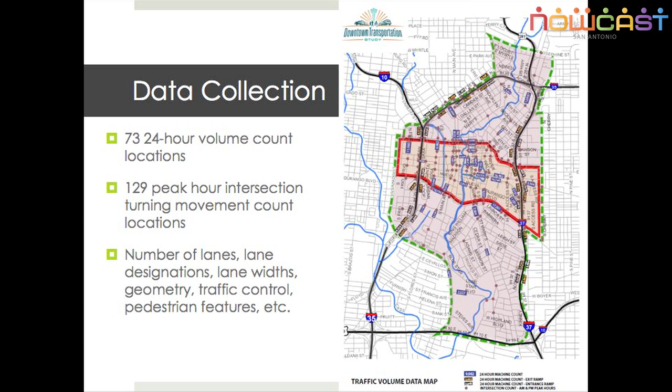On this map, you can see our study area. We have a very large outer study area, and our focus was primarily in the downtown core, which is highlighted in red. All of that information went into our model, which it's hard to see from there, but things that look like little ants on the screen show you part of our model.

We actually have a model for the whole of downtown, and all of the improvements that we were proposing, we tested out on the model, and we tested them out cumulatively to make sure that nothing was going to create a problem today or in year 2020.

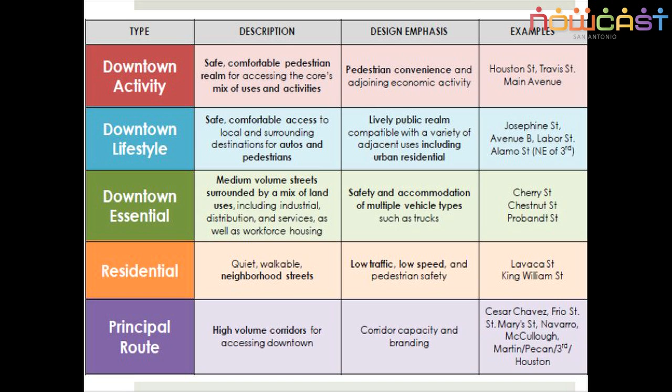The principal routes were ones that we identified that serve a primary role of carrying traffic through the downtown. That doesn't mean we don't still think we can improve them or create some different amenities along them, but it means that we need to keep in consideration the fact that it is important for traffic purposes.

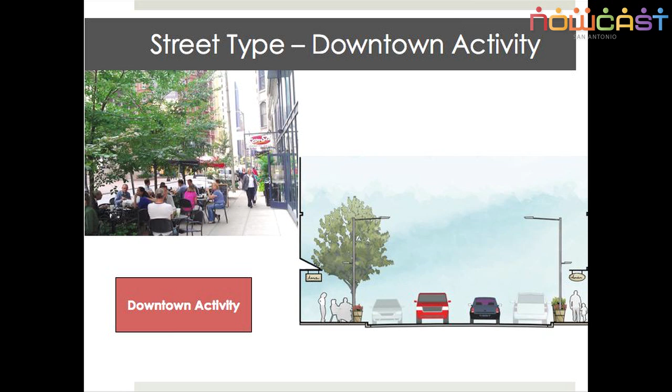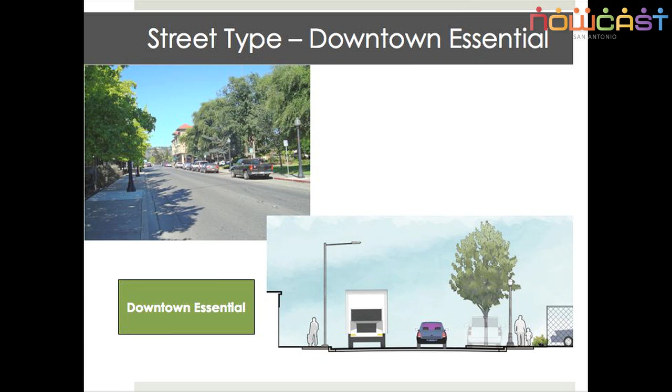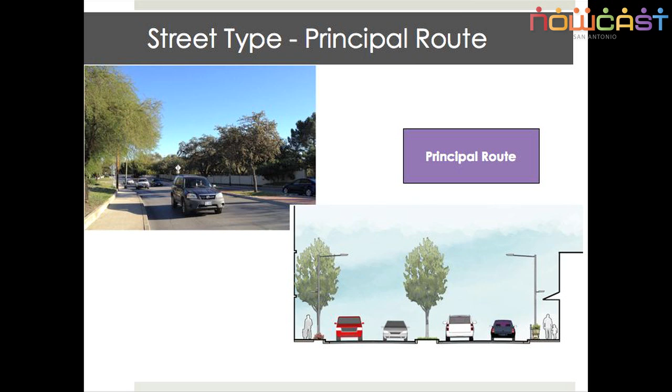It may or may not have parking on one side, would have trees and sidewalks. And the principal route would primarily have 4 lanes, possibly with a median for access management purposes.

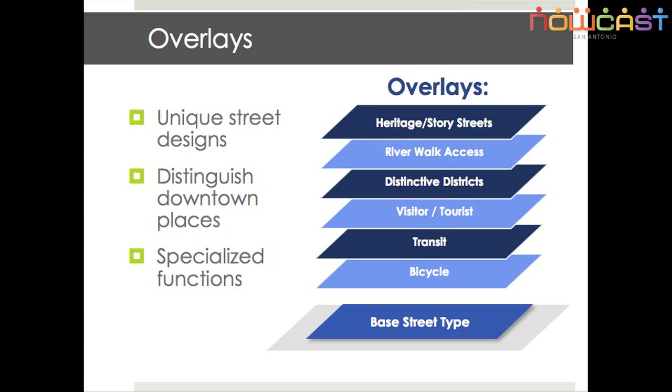In addition to the 5 street types, we created overlays. Overlays are based on unique characteristics of the roadway, for instance unique street designs, specific places downtown which should be reflected in that overlay, or special functions of the roadway. A good example is the transit overlay and bike overlays.

We did ask people to fill out comment cards and go online to fill out our survey. I wanted to show you some of the results of that.

We asked people to identify top choices for the different categories of streets. Interestingly enough, furnishings - benches or cafe seating - and street trees were the top two for downtown activity and downtown lifestyle. The downtown essential street had...

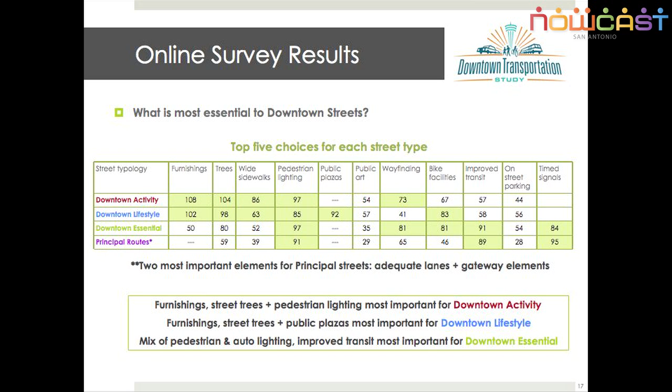Pedestrian and auto lighting plus improved transit. We also asked you some questions about specific roadways.

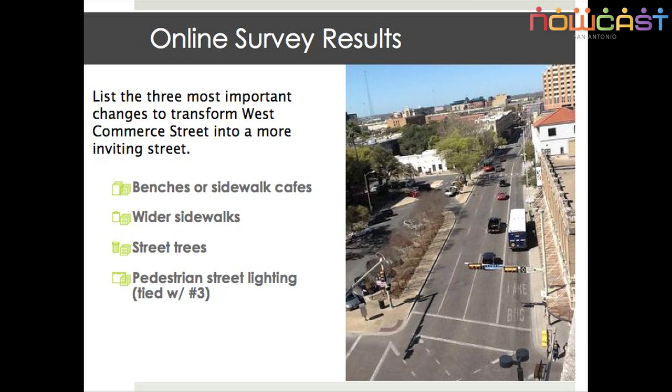For instance, on West Commerce Street, we asked what are the 3 most important changes you could make? The top 3 were, again, furnishings, wider sidewalks, and street trees, with pedestrian street lighting tying for 3rd place.

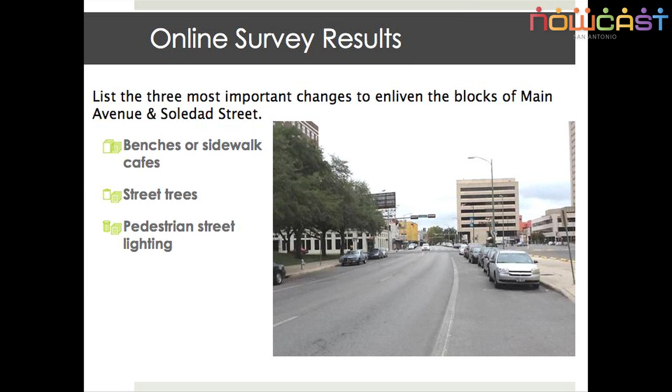On Frio, it was enhanced crosswalks, pedestrian street lighting, and wider sidewalks. And on Main and Soledad, street furnishings again, street trees, and pedestrian lighting.

We also asked a question about, given the choice, would you choose to allocate roadway space for converting a one-way street to a two-way street, or using a lane to provide wider sidewalks, street trees, and other amenities? 84% of respondents preferred to use a lane for the other amenities rather than converting it from one-way to two-way.

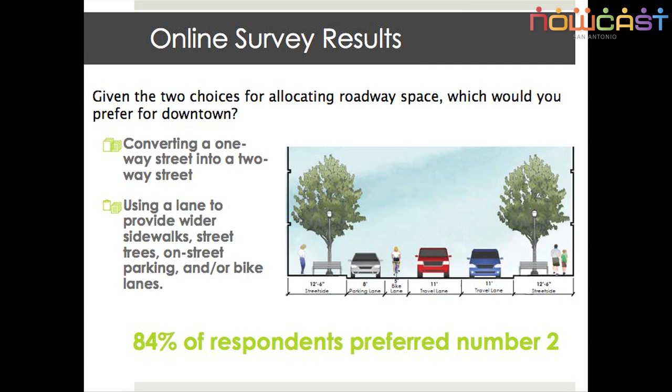Another question we asked: what was your favorite street for walking? Houston Street topped the list, with Alamo and Commerce coming in a far second and third. For cycling, it was Alamo Street, St. Mary's, and Broadway.

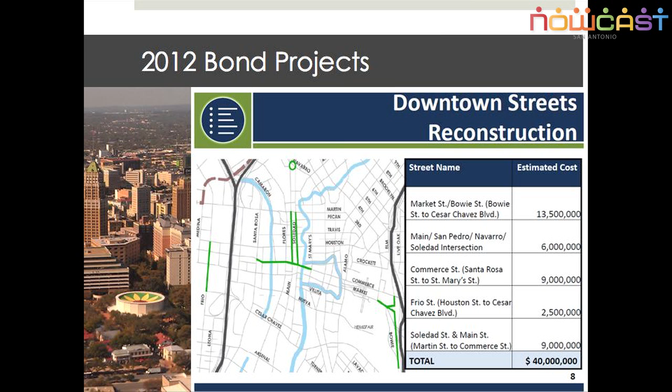Now I want to talk to you about the bond projects. There are 5 bond projects. As Sonia said, early voting started today and goes through May 12th. Each of these projects has a specific type of improvement, and I'll describe them to you.

Market Street, as Sonia mentioned, the consultant team that is just starting the design is here tonight, so you have an opportunity to ask them questions. The primary purpose of the Market Street realignment is to reorient Market Street to run parallel with Commerce and to connect with the southbound exit ramp at Commerce.

You'd have connection to the east side via Commerce and Market and that new connection. You'd also have a connection from the southbound exit ramp to Montana, Cesar Chavez, and Market. And you possibly would have a connection to the east side and Robert Thompson Center via a two-way operation on Montana, which is something being looked at.

The second project is Commerce Street, with limits from Santa Rosa to St. Mary's. What we're proposing on Commerce Street is to remove a lane - the bus-only lane - to accommodate wider sidewalks, street trees, streetscaping elements, and placemaking opportunities.

I think it's important to point out, as Luis said, that all of these projects from the downtown study are concepts. The only projects that actually have identified funding are the 5 bond projects, and that's if the bond program is voted on and approved.

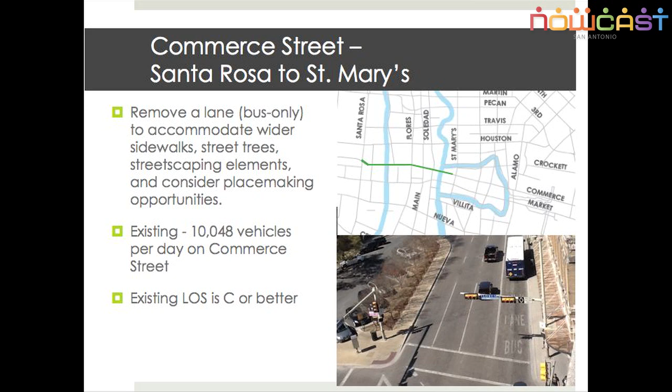Frio Street, between Houston and Cesar Chavez. What we're proposing is to restripe the two travel lanes in each direction so we can take some width from the inside lane and give it to the outside lane, where we can add sharrows. Sharrows are a wider outside lane that can accommodate bicyclists, with a unique pavement marking that helps identify to drivers that bicyclists will be sharing that lane. The placement of the pavement marking also helps guide the bicyclists.

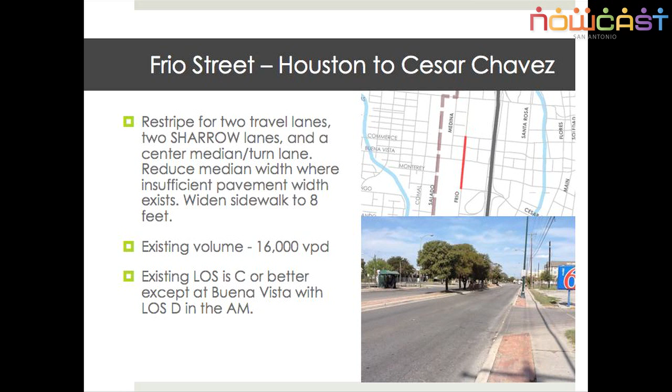We would also reduce the median width where we needed to. We would improve the pedestrian crossing in front of UTSA and widen the sidewalk to 8 feet where we could.

This is a plan view of the concept for Frio, and this is an example of a sharrow pavement marking.

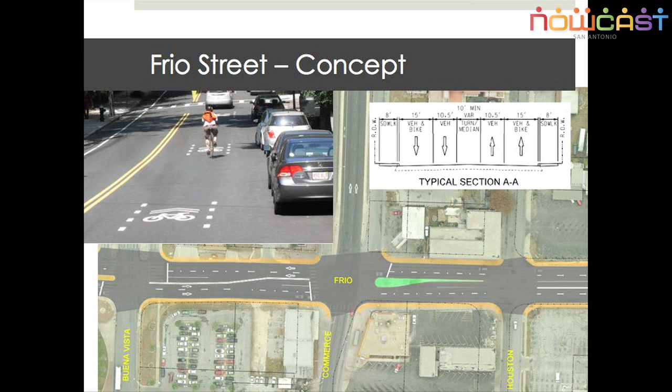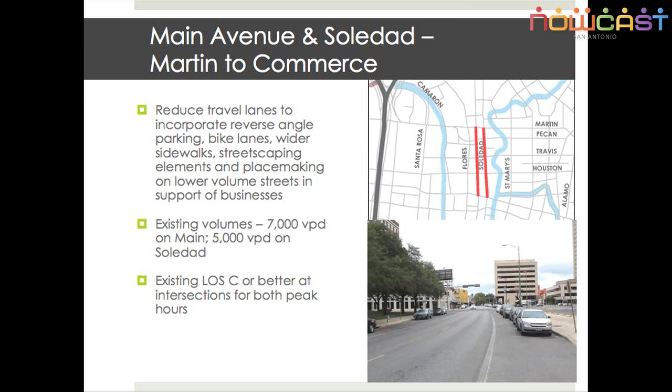The other project is Main Avenue and Soledad, with limits from Martin to Commerce. This is a really exciting project because it transforms the street. When Main Plaza was put in, Main and Soledad ceased to be through routes north and south through downtown, and as a result the volumes dropped significantly. Today there are 7,000 vehicles per day on Main and 5,000 on Soledad, so we saw this as an opportunity to take some of those traffic lanes away and use them for something else.

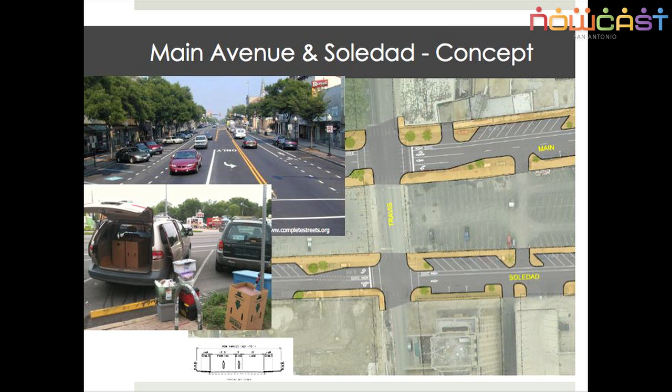This is an example of one of the benefits of reverse angle parking. Probably the greatest benefit is that drivers can see bicyclists when they exit the parking space, and they're not backing into traffic, so that's a definite safety benefit. You can also load your car from the rear instead of standing next to the traffic lane.

This is an example looking at Main Avenue at Pecan, looking towards Commerce. This is what it looks like today, and you can see how wide the pavement is. And this is what it could potentially look like if we implemented some of these improvements, with the bike lane and reverse angle parking.

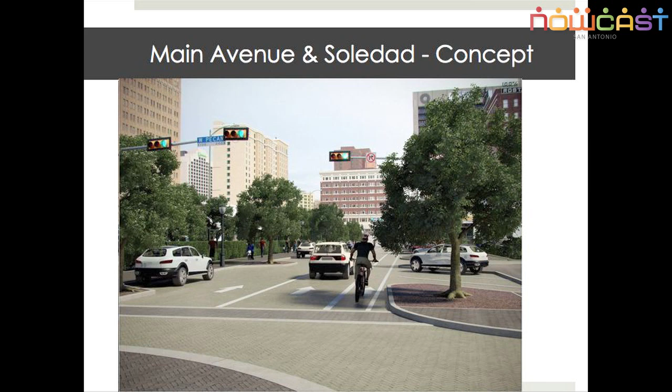This is the intersection of San Pedro, Main, Navarro, and Soledad, very near where we are. If you've driven through it on the way here, you know it's very difficult to navigate, with a lot of channelizing islands. It's somewhat confusing—when I've driven through it, I've actually feared I was going the wrong way several times. So we really wanted to simplify this intersection, remove driver confusion, and improve safety, while also taking advantage of streetscaping and placemaking opportunities.

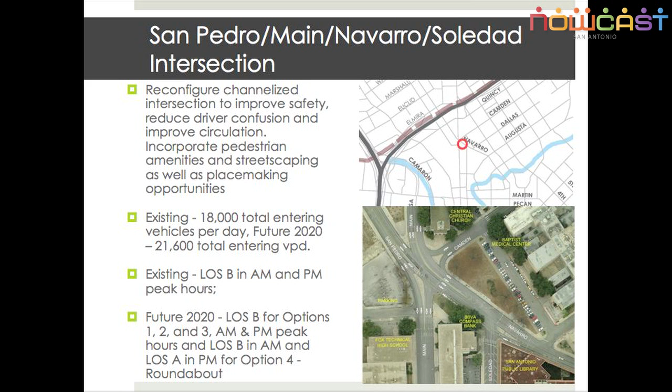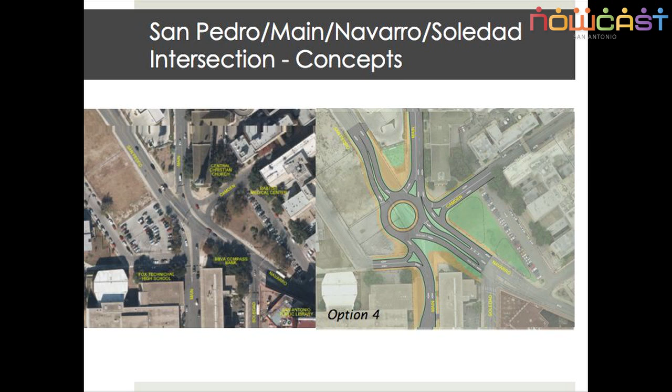This is option 4, a roundabout, which I think really simplifies the turning movements for people. All 4 options keep the bus contraflow lane, but this one is easy for buses to navigate too. The negative is that it requires the acquisition of right-of-way.

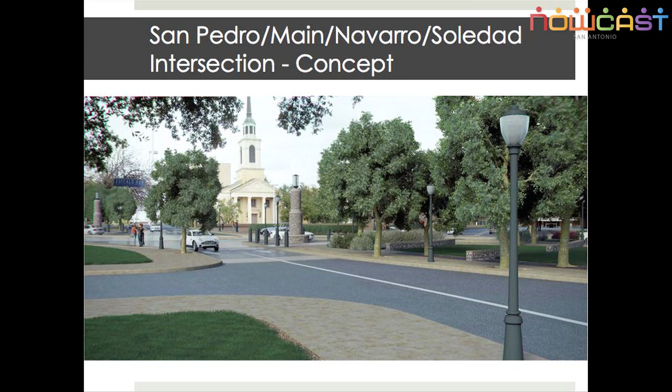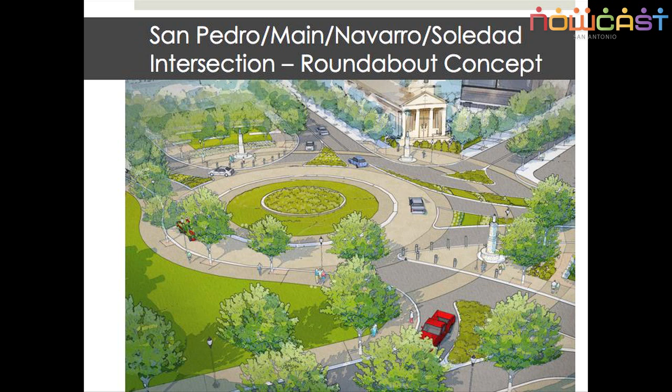Those are the 5 bond projects, and again they're just concepts at this point. The way the process works is if voters approve the bond program, Luis's group will hire consultants to do the design, which is the next step. During design, they'll have survey data so they'll be very detailed and easily identify what can and can't be built, and the funding allocated will limit what can be done.

The first of our additional projects that we identified as part of our study is the Navarro and St. Mary's concepts. We looked at Villita to Convent. This is the aerial of what it looks like today.

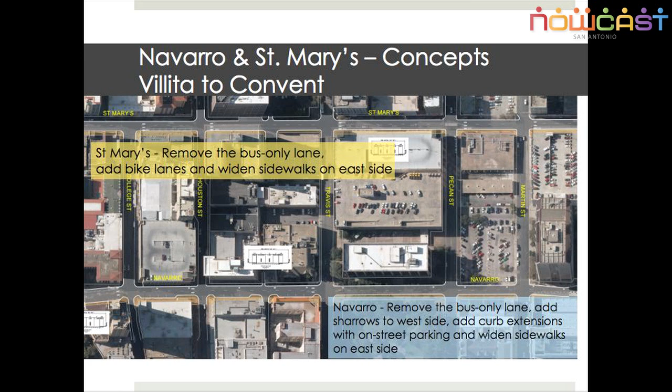What we're proposing on St. Mary's and Navarro is to remove the bus-only lane. On St. Mary's, we're going to add bike lanes and widen the sidewalks on the east side of the street, with north to the right. On Navarro, we're going to remove the bus-only lane, add sharrows to the west side, and add curb extensions with on-street parking, widening sidewalks on the east side.

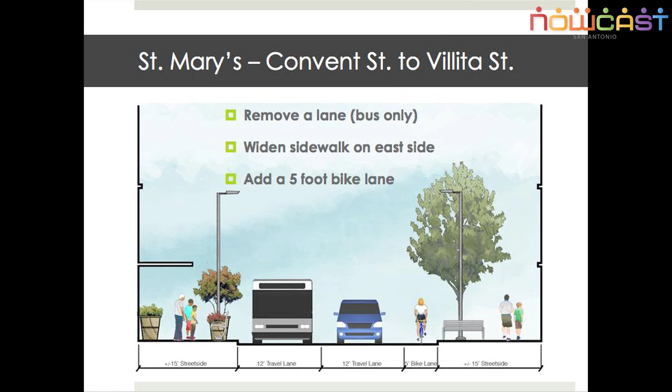This is the existing cross-section on St. Mary's. You can see 1 bus lane and 2 travel lanes. This is what we're proposing: adding a 5-foot bike lane on one side, widening sidewalks on the other, and removing the bus-only lane. We would leave a 12-foot lane for buses, which could easily accommodate the transit service.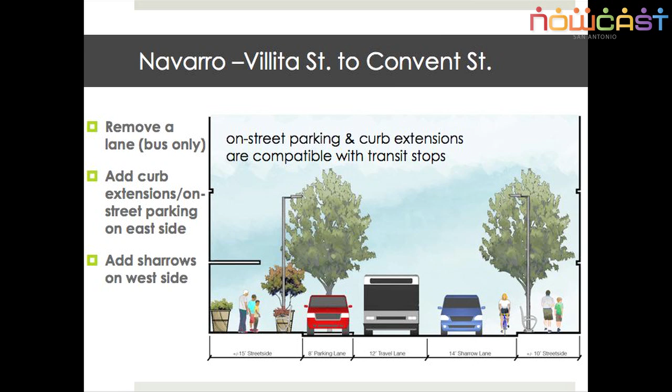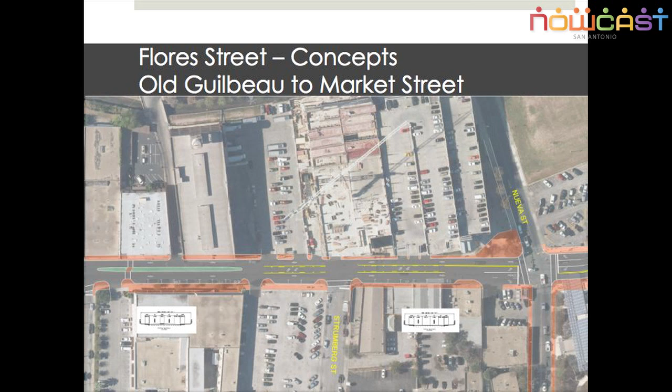This is Flores Street. We looked at making changes between Old Guilbeau and Market Street. We're proposing to change the cross-section to a 3-lane cross-section with a center turn lane and a mid-block pedestrian crossing. We'll widen sidewalks and add curb extensions and on-street parking on one side.

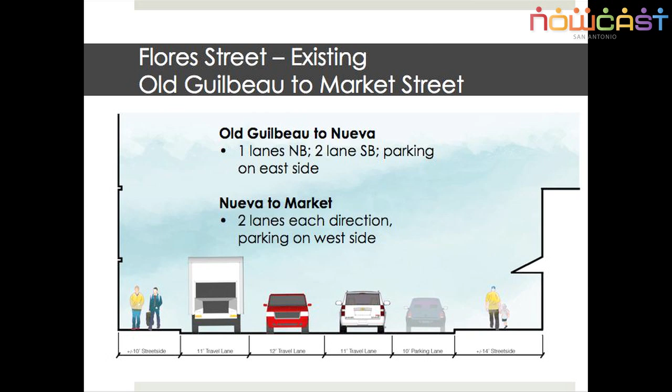This is the existing street between Old Guilbeau and Nueva. It's 1 lane northbound and 2 lanes southbound, with parking on the east side today. Between Nueva and Market, there are 2 lanes in each direction and parking on the west side. What we're proposing between Old Guilbeau and Nueva is the 3-lane cross-section.

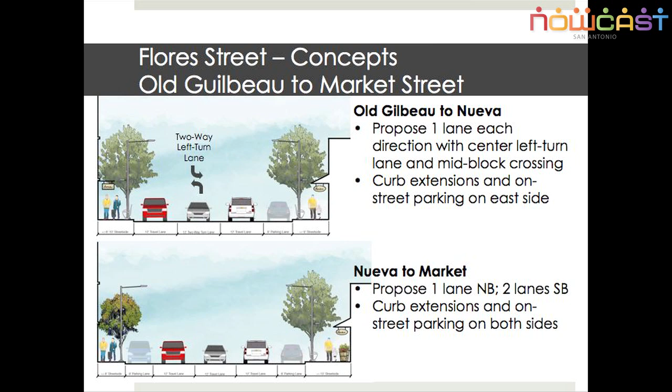The center lane would be a 2-way left turn lane. We'd have a mid-block crossing, curb extensions, and on-street parking on the east side. Between Nueva and Market, we'd have 1 lane northbound, 2 lanes southbound, and curb extensions with on-street parking on both sides of the street.

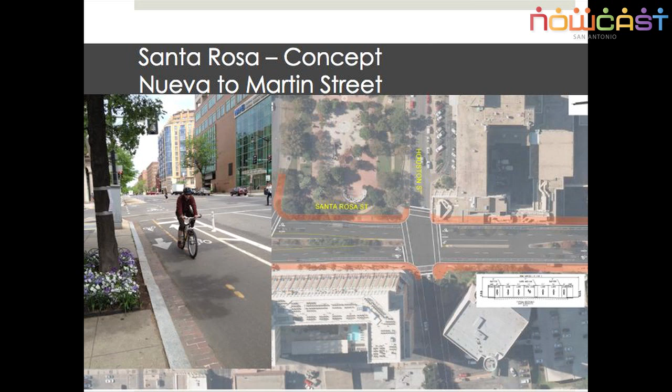This is an example of what a bike lane with a buffer strip looks like. This is the cross section, so you can see now we have 2 lanes in each direction. There's a 3-foot buffer strip separating the bike lane from the nearest travel lane, and the sidewalks will be wider and improved.

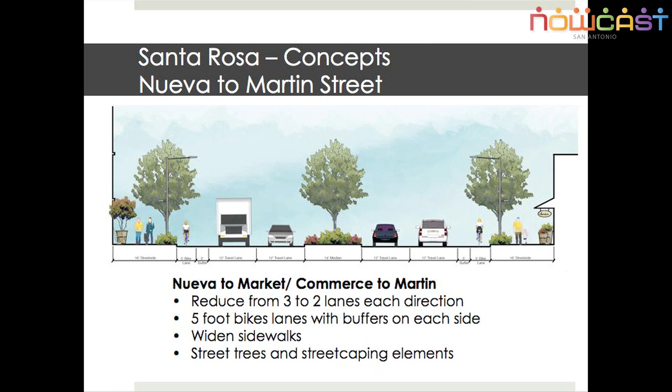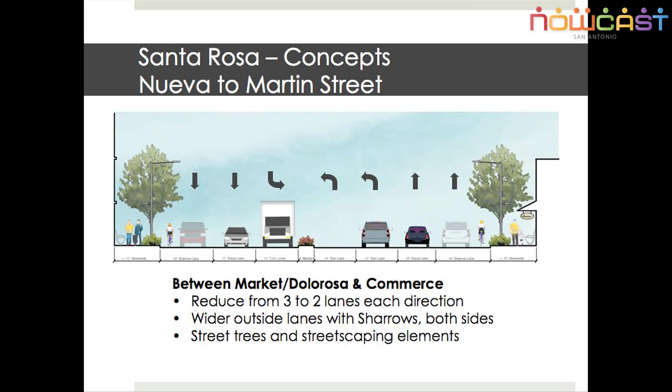This is between Market and Commerce. In this section we would keep the turn lanes, and we would have 2 lanes in each direction, with a sharrow on the outside lane, which would continue the bike facility, but we didn't have enough room to have a separated bike lane.

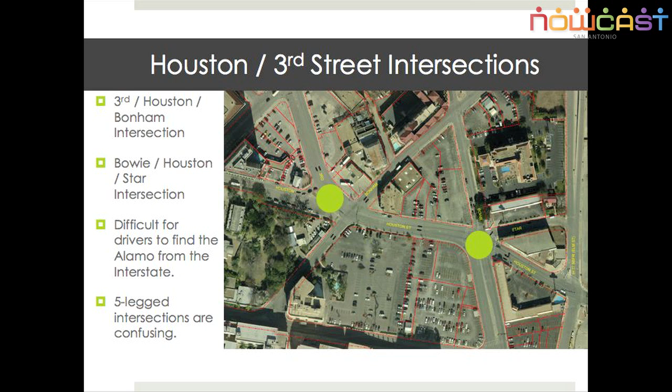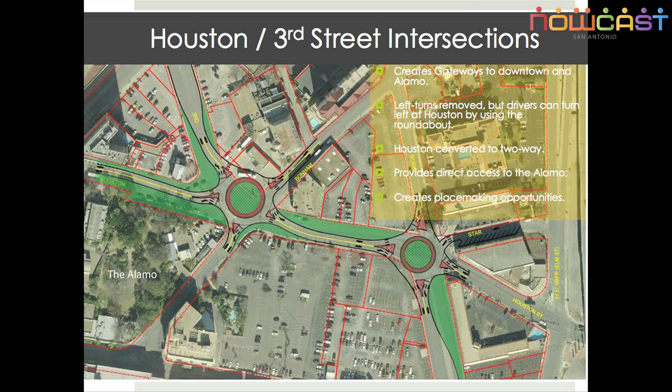So what we're proposing to do to remove some of that confusion for drivers is to create 2 roundabouts at both of those intersections. Those 2 roundabouts would give an opportunity to create a gateway for the Alamo area, and would also allow drivers to easily find the Alamo and make a left turn on Houston. We are proposing to make that 1 block of Houston the same as the rest of Houston, which would be 2-way, so now drivers could actually turn left and reach the Alamo.

This is an example of what it potentially could look like if there were a roundabout at Houston, 3rd, and Bonham, looking west towards the Alamo. The Alamo's in the top left portion of the screen. This would take away left turns at that intersection—you would actually go around the roundabout to make your left turn. Roundabouts are a lot safer than traditional intersections because you don't have the potential for angle accidents.

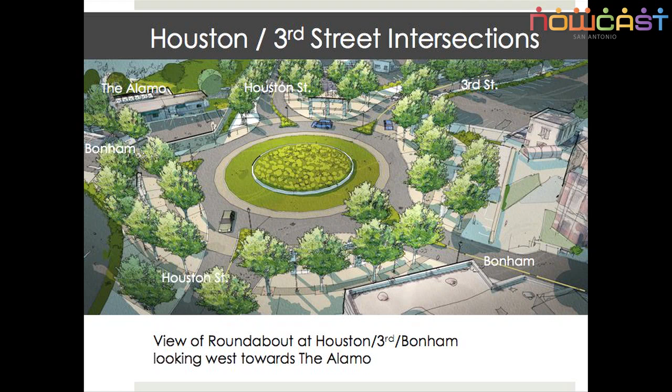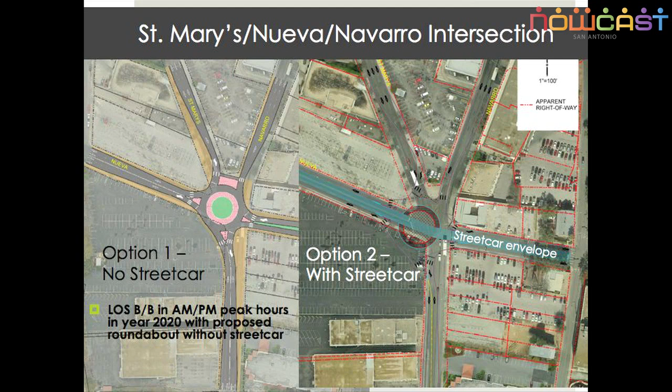Another place where we're proposing a roundabout is the intersection towards the south, at St. Mary's, Navarro, and Nueva. It's a 5-legged intersection also, near HemisFair Park, La Villita, and Riverwalk. These are examples of options we developed that show a traditional roundabout on the left, and in the event that a streetcar was on Nueva, we wanted to make sure we could accommodate the streetcar going through the center of the roundabout—we show that there's enough space for that to still be a possible option there.

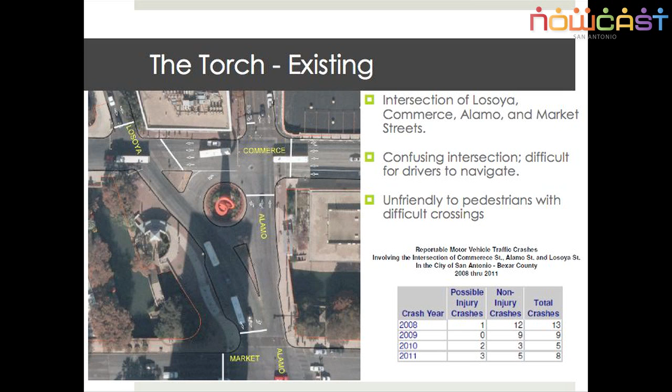So we actually looked at several options. Each of them have different patterns associated with them. Some of them improve the pedestrian crossings more than others.

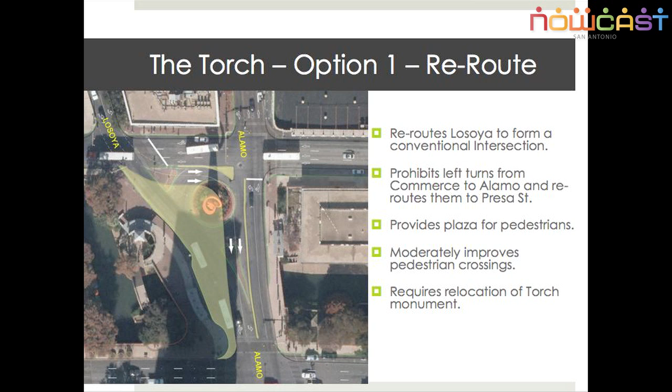This is option 1, and what it does is reroute Losoya traffic from the left side of the torch to actually being 2-way in that block between Losoya and Alamo along Commerce. This creates an additional pedestrian plaza area, which you can see right here, so we get a little expansion of that. It moderately improves the pedestrian crossings, but it would require relocating the sculpture, which would be very difficult to do. This option is similar, and costly.

So this is option 2. It's similar to the other one, it's a right angle also, and it actually creates more pedestrian plaza area. It doesn't require the torch sculpture to be moved, and it does significantly improve pedestrian crossings. However, it would require Losoya and Alamo to be reversed, and the bus contraflow lane on Alamo would be open to the public. That would also require that Crockett be reversed between Losoya and Alamo. So the southbound traffic traveling down Losoya would make a left on Crockett and then continue down Alamo, which is how we were able to take them out of the intersection.

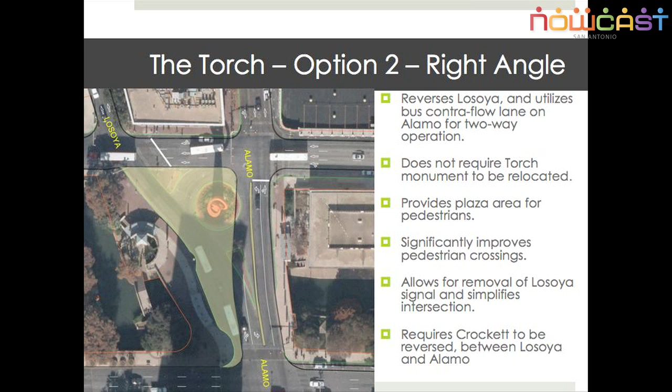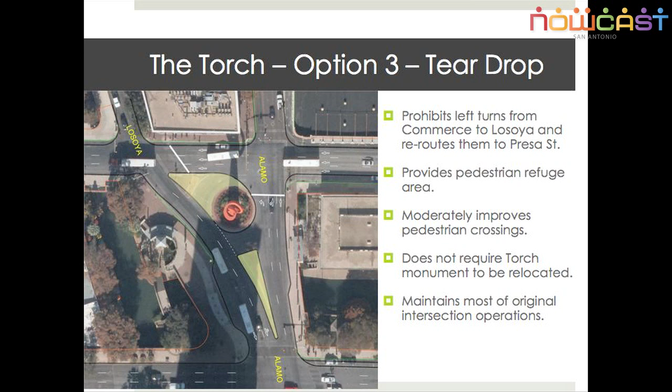This is option 3. It actually keeps the traffic patterns most closely to what they are today, but it doesn't improve the pedestrian crossings as much. So it keeps the operation very similar. We do gain a pedestrian refuge island right there, so it's better than what it is right now.

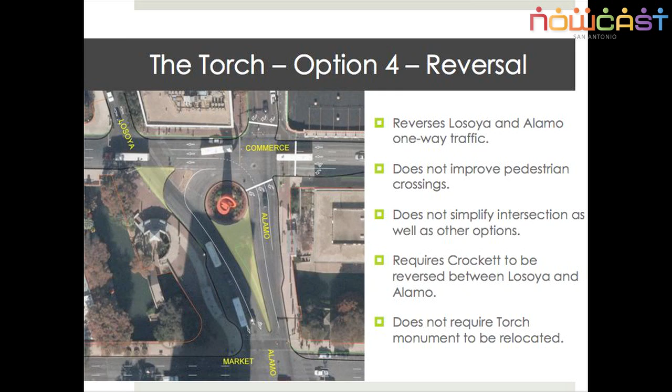So each of these has its pros and cons and costs associated with them. We'd like your input, so after the presentation, you can go back into the exhibit hall and make some additional dots.

At this point in time, I'm going to bring Alessandra Galletti up. She's going to talk to you a little bit about placemaking opportunities associated with the projects, and she is with Project for Public Spaces. Alessandra.

I fell in the same hole.

Good evening, my name is Alessandra Galletti. I work for a nonprofit organization, Project for Public Spaces in New York. Our mission is to create spaces where people can enjoy their streets or their plazas, etc.

So we start looking at all the projects that Carrie just presented, from the community point of view, and what can be done on the sidewalks, etc. One first project that we looked at is Main Avenue and Soledad, where we identify a few areas where activities could happen. Because in addition to narrowing the streets and having more sidewalk, what can be done to create lively streets downtown.

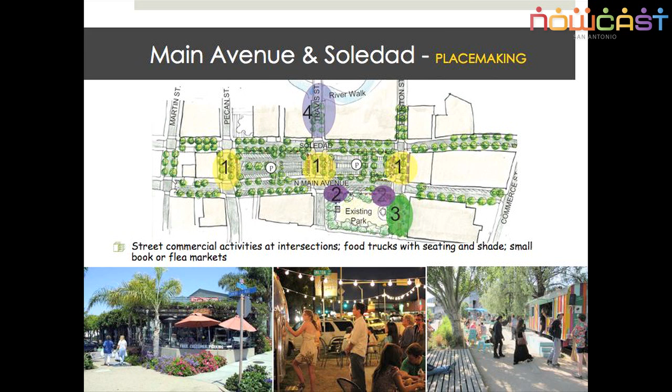And where you see number 2, we also identify on Main Avenue a park, the existing park, where additional activity could happen. You can have games, like a kiosk with games to play in that park. And number 3, the extra wide sidewalk could accommodate additional food trucks or tables and chairs for the lunch crowd.

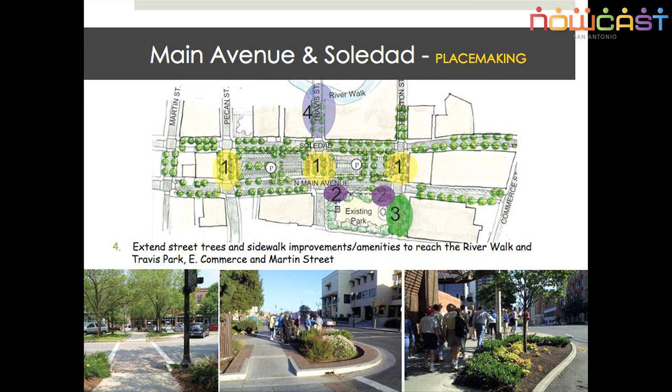Also, very important, we identify the connection to the Riverwalk along Travis Street, and so it should become like a commercial area, with businesses at the corners, to make Soledad a busier street.

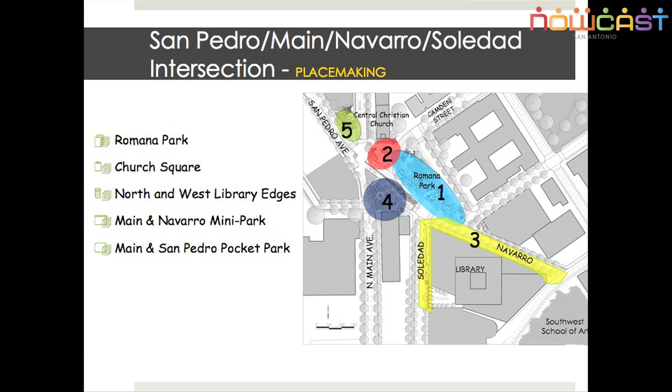The next project that we looked at from the placemaking point of view is San Pedro, Main, Navarro, and Soledad intersection, that is just outside here. There is a wonderful possibility of a park that can be used by the community, by the library. We identify number 1 as possibly an area where the library could expand.

We developed only one of the four schemes that the engineer developed, because we like this one better, with Camden Street. That could become closed if there is an event, for example a wedding at the Central Christian Church, or an event at the park. Then this street can be closed and the traffic would go in another route.

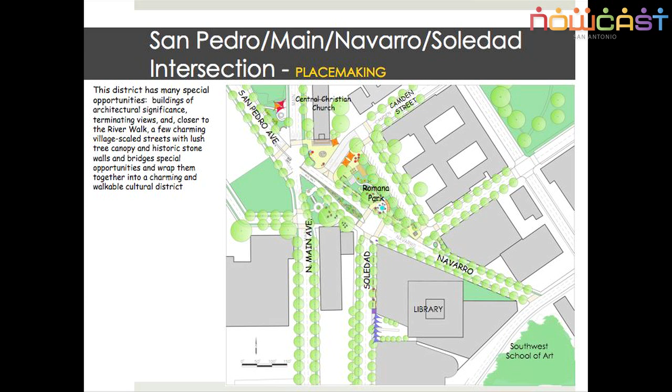So let's go and look at the details.

So in the park, we can have a play area for kids, reading rooms, where maybe some events can happen from the library. There can be readings, there can be a library bookshelf where you can go pick up a newspaper and read it in the park. They do this in Bryant Park or other libraries around the United States.

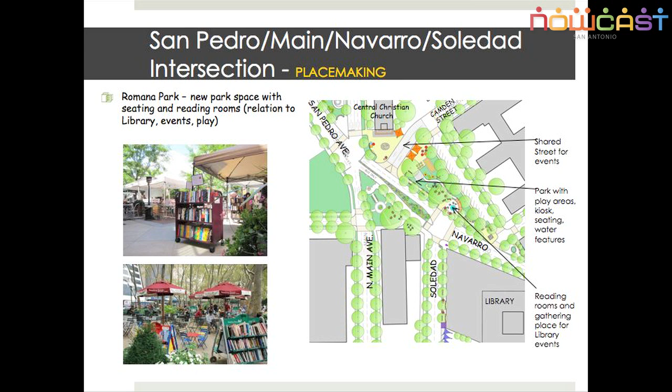Then the park could also have kiosks to support all these activities. Maybe you can get a coffee and then sit there.

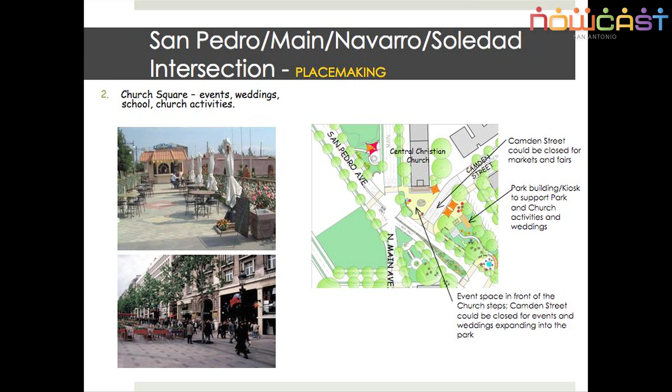Then the church square that will be just in front of the church should be protected a little bit from traffic, so in the future it can become a square where events could happen, either related to the church, concerts, or where people and the neighborhood can get together.

We looked at the north and west library edges that are now quite bare. We think adding trees, widening sidewalks, and mainly marking the main entrance is quite important, because coming from outside it seems like the library entrance is not marked enough, and maybe softened with green. Maybe we put vendors outside.

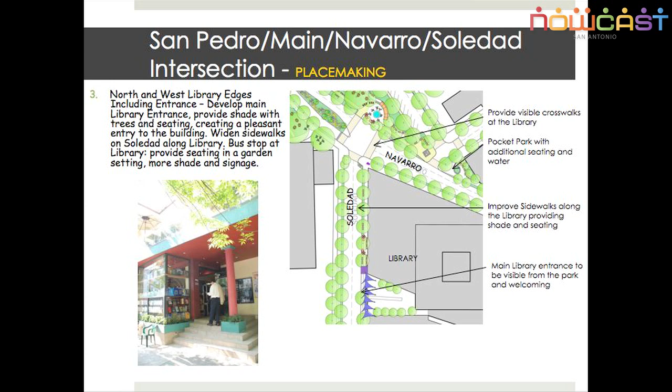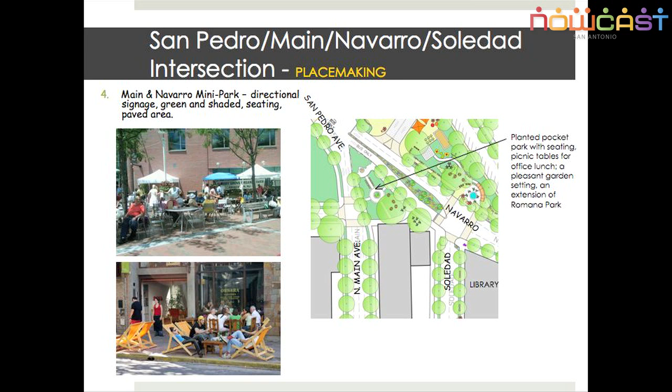With this new roadway configuration, there's also the opportunity to have pocket parks, like this green space in front of the office building, which could become a place with picnic tables for lunch, or where people can just go and rest. There's a high school here, many other offices, so in addition to the Romana Park, it seems like with this new configuration it's almost the same size — a good opportunity for another pocket park.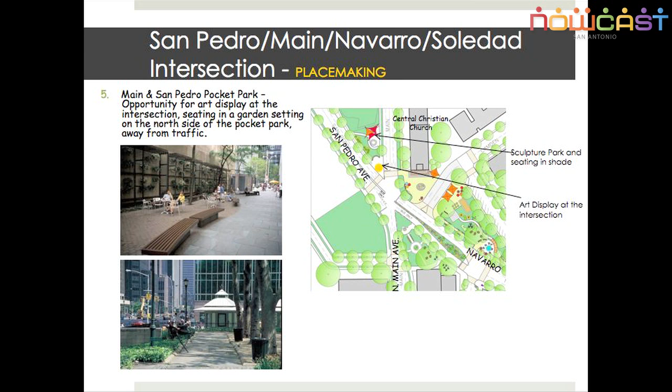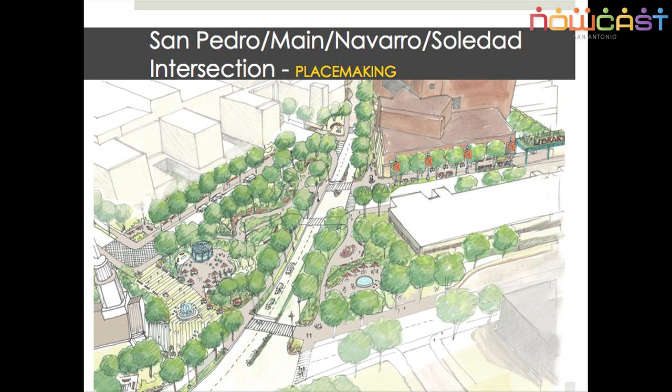As well as this one up here, it could become like a gateway to the area and have public art. This whole district should be connected also to the Riverwalk down there and the art school, the Ursuline Institute. And this rendering shows, as an idea — not a design idea — just how the library should become a much softer edge, attracting people in, and the connection to the park is quite important.

Another area we looked at is the Houston Street corridor, the gateway to the Alamo and the gateway to downtown. So number 4 we identify as the gateway to the Alamo, and 5, the gateway to Commerce Street and downtown.

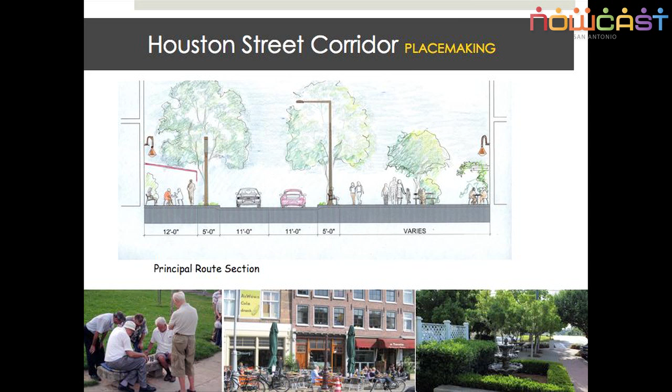Very important: Houston Street should be narrowed, but also we think it should become almost a shared street where the Emily Morgan Hotel can expand and have seating areas outside. This is a shared street, so it's traffic calmed, very slow, and the Alamo wall can have seating, and the gardens can come out. That's to give residents, not only visitors, a place to go for the evening. We envision Houston Street becoming something like these two images.

One important thing is the Alamo should have a face along the gateway roundabout, so maybe there's talk about having a future museum. If there is a museum at this entrance on Houston Street, maybe there should be an entrance for that.

On the previous presenter, she was showing a traffic plan, and they removed — I don't know if you can go back and get her slide or not — but they didn't show a connection from the roundabout all the way to the Crockett Hotel, number 3.

So the only thing I'm noticing is you did — you want it to be connected. Yes, because in reality that is the main access to the Alamo, since people don't use Houston as it doesn't lead to the parking as of now. So this is what people currently use. But we think this street should be very calm and shared. Even if you arrive this way, because that's how you arrive now to the Alamo and then go and park here, it needs to be really very calm.

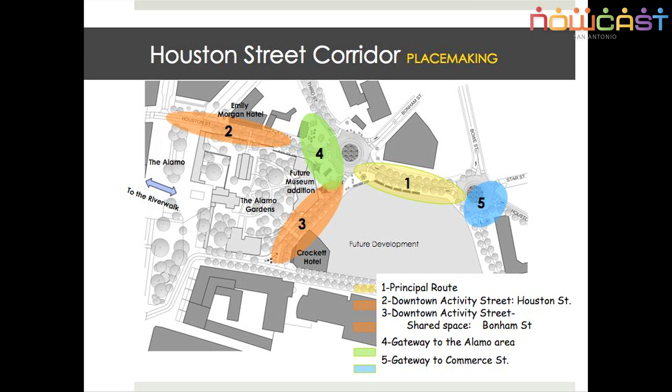It might not be possible, I don't know, but this street here needs to be shared. It is very important. Again, we wrote 'future development' here. Now it's a huge parking lot, but in the future, because this Houston Street is a principal route, we feel it could become a site for development.

Going forward, I was saying that if the entrance to the museum happened on this square, on this roundabout, it will really attract people. People will know, okay, this is where I'm supposed to go, and then they go to the parking.

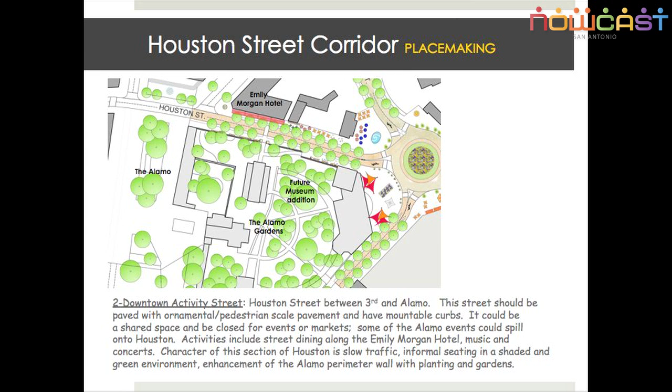These are images. We imagine this shared street with very comfortable furniture, very lush planting, coming out of the Alamo. The Alamo wall is a little bit stark, so it needs that green coming out to soften the edges.

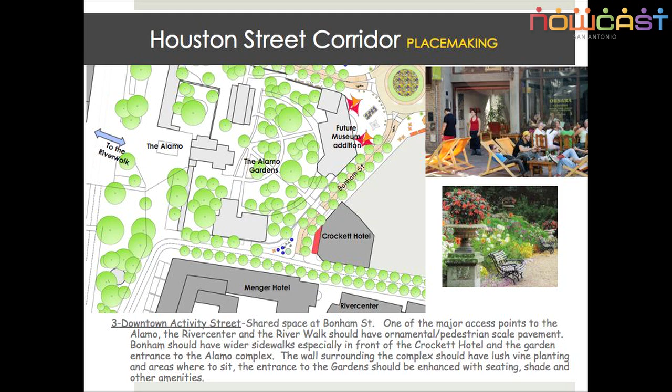You also see a lot of trees, because we believe they contribute to placemaking, since people in the summertime in San Antonio cannot really be outside without shade. So this gateway to the Alamo should have a place where you meet each other and be very comfortable, with chairs, as an arrival point.

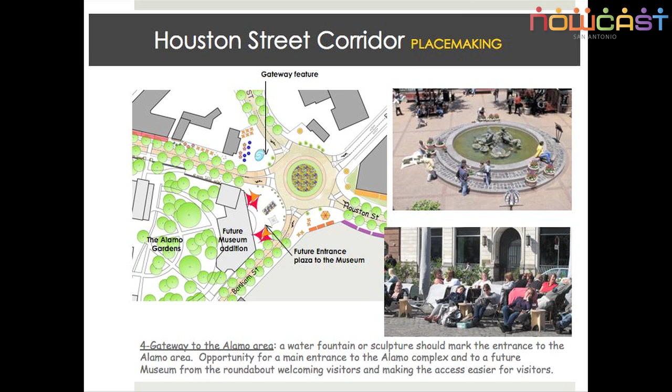For example, this needs to become a gateway to the Alamo. So when you arrive from down here and go up, you say, oh okay, that's where the Alamo is. This is where history and art will meet. There could be a history walk that starts from here. So anyway, it is a very important area.

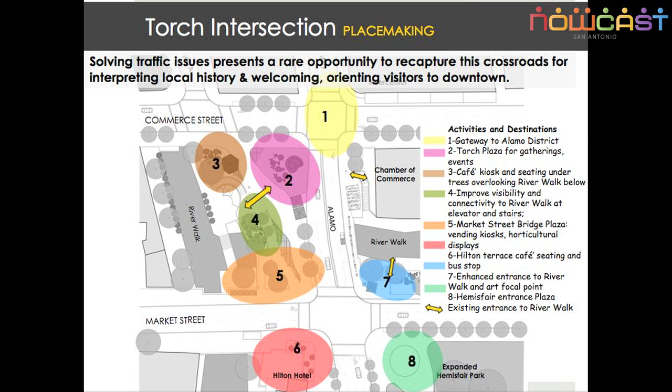This torch plaza could become an area for gatherings, concerts, art, events, and a main entrance to the Riverwalk. What about having a terracing down and cafes up? For example, up here have a kiosk, a place where you can go get food, in a garden environment. So I'm going to show you quickly the details of this.

This star represents a visible entrance. Now there is an entrance to the Riverwalk, but what about opening that up? So there is a relation between down at the water and up at the street level. It is a very important component, the Riverwalk.

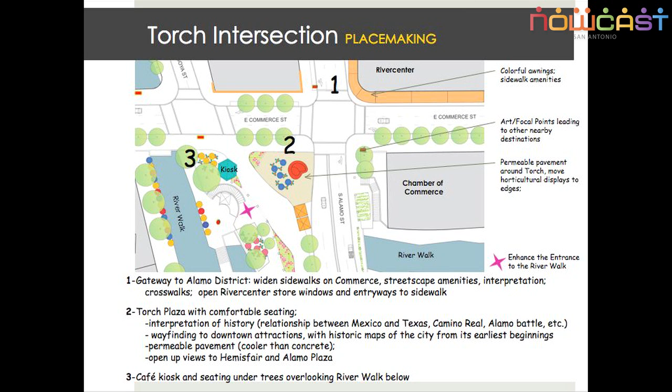The next slide shows 2 other areas: the entrance to the Riverwalk, and up here a very beautiful bridge. Maybe there could be markets, tents, a market street with tents, and again a relation between the water and the street level up here.

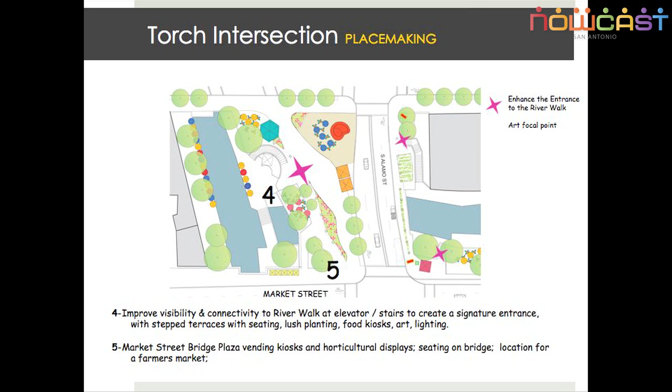Also on this corner, West Market and the Alamo, in the future the Hemisfair entrance will get to this point. What about having an information kiosk that can help organize how people find their way to the Alamo, to the Riverwalk, and to whatever else is happening downtown.

We think this corner of the Hilton should also contribute to create a place. What about the Hilton having a terrace out here, the bus stop being enhanced with seating and more pleasant, because now people are leaning a little bit on the beautiful bridge, but having chairs and benches.

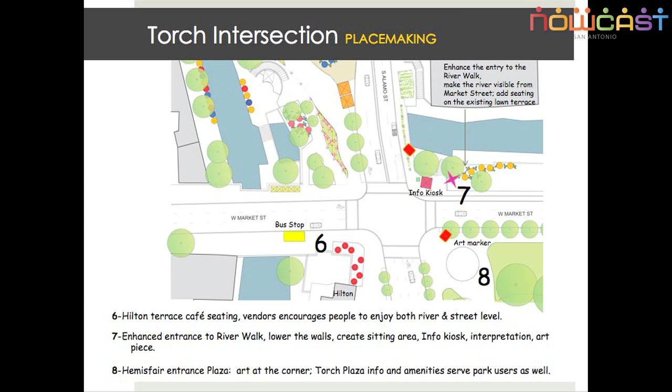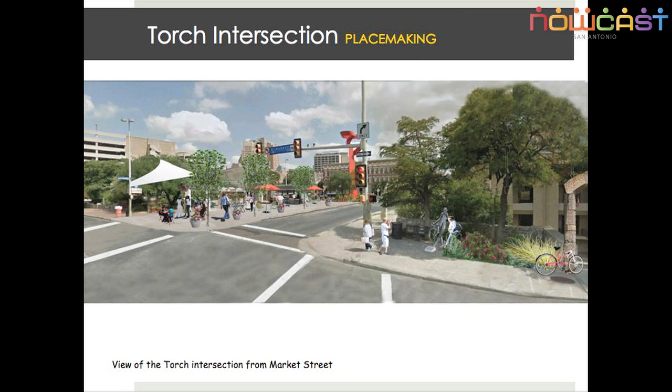Also this other Riverwalk entrance is really aligned with this walk, so it could be enhanced as well. There are 2 major entrances to the Riverwalk in this location. This sketch comes from Hemisfair Park. It should become a very green and fun place to be, with a lot of things happening. I think we are done.

These are just a few ideas, and I would love to answer all your questions in the other presentation room.